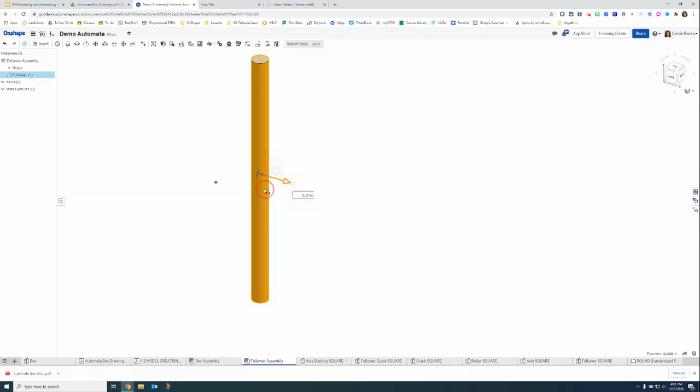Once we snap it, we're going to click that again. See if we can do it. There it is at the top. When I right click, I want to move that to origin, click out, and we are going to fix that.

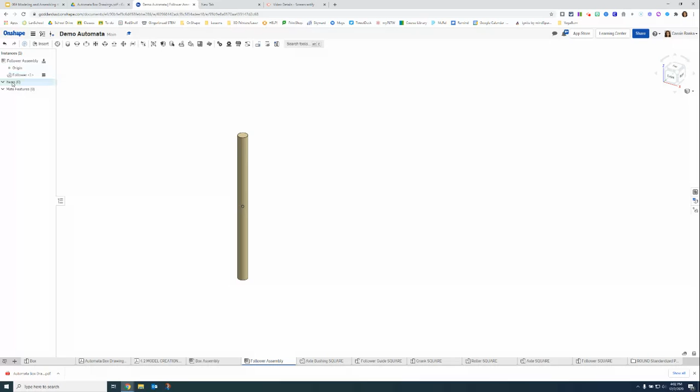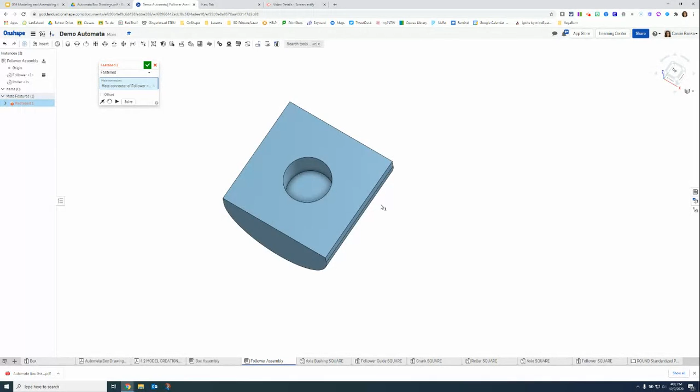That way the follower is what is not moving. Now I want to insert my roller, click to place, and I am going to use a fasten mate to glue the bottom of my follower to, now this is important, you're going to go to the inside, so you've got to zoom in. If you keep defaulting to this outer circle, that means your follower won't actually insert into the part that we modeled for it. So you want to make sure you get to that interior circle.

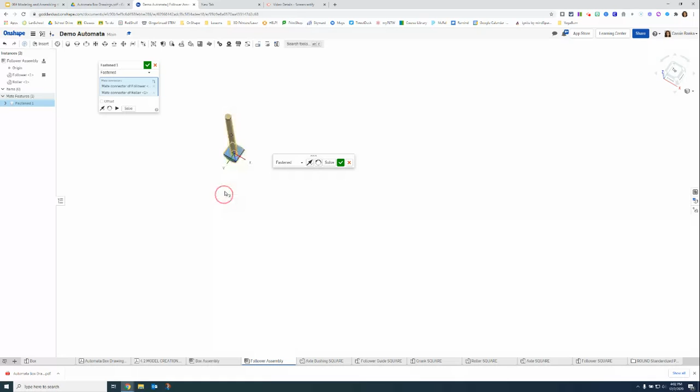Go ahead and click, and let's zoom out, see if it works, and it looks like it did. So I'm going to go ahead and hit good to go, and if we hover over that part, you can see that that part does go into the hole, just like we had designed it to do. We do not need a second fasten mate. So we are done with our follower assembly.

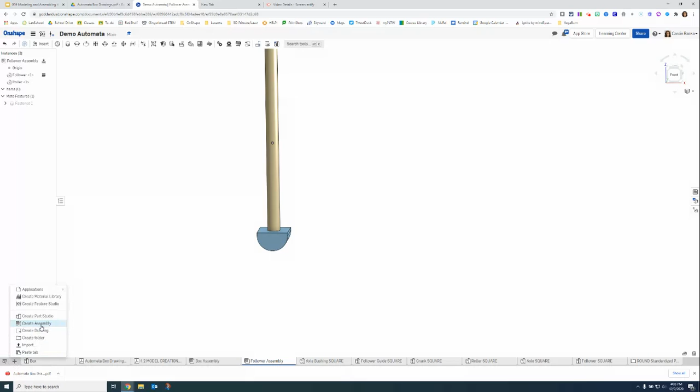Pretty easy, wasn't it? So the next part is actually a little tricky. We're going to do some offsets here, but we're going to create our crankshaft. I'm going to go ahead and create a new assembly, and we're going to rename it Crankshaft. I am going to start by inserting our axle, so bring in the axle.

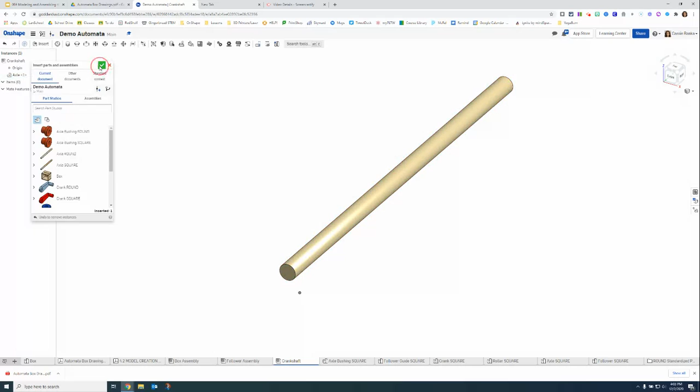First part, we want to make sure we get that little triad. Oh, green check mark, we're good. Grab our triad, grab that circle, find Pac-Man, then right click, move to origin. Right click, fix. And now we can kind of maneuver and start with adding in our bushings.

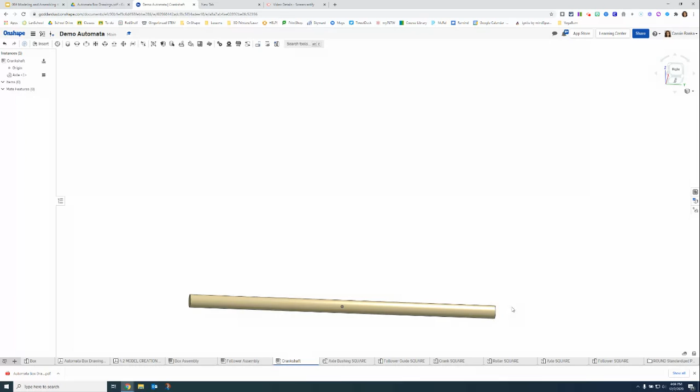The way this is going to work is everything is going to be fixed because they will rotate together once the crank kind of rotates around everything. We are going to insert our axle bushing.

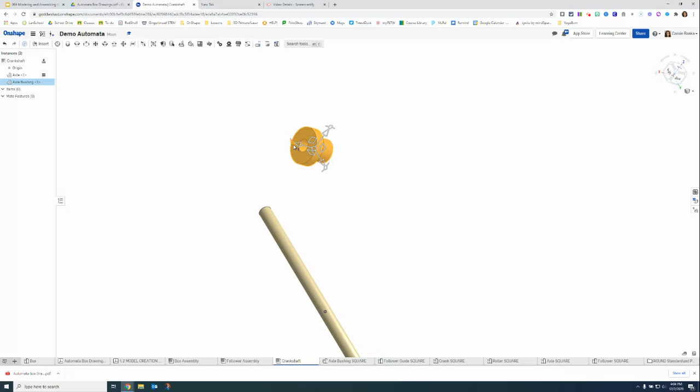You'll notice this axle bushing is not lining up, so we're going to highlight. Well, let's try accept. We're going to highlight, and then we're going to use these rotators to allow us to move it the way we want it to go. I'm going to grab this little sun guy, and that will let me rotate it around the way that I want it to go. Then I can kind of move it to where I want it to go.

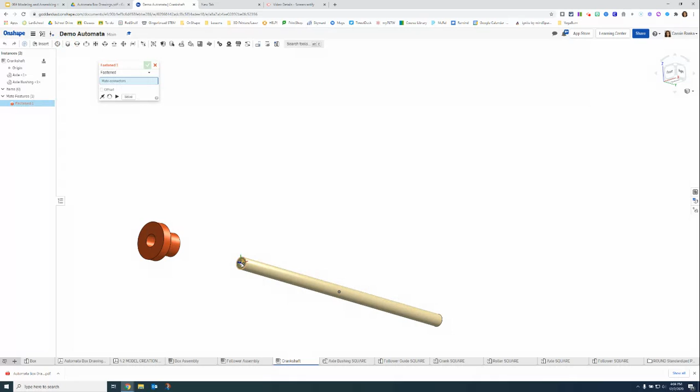Now with this, the way this is going to work, I want the end of my dowel rod to be flush with the end of my axle bushing. So when I'm using my fasten mate, I want to keep that in mind, that I want my blue arrow pointing out from the end of the dowel rod, but I want it to go all the way in to this bottom circle, and I want that blue arrow facing outward. So there we go. We've got our axle in the axle bushing, and everything is good.

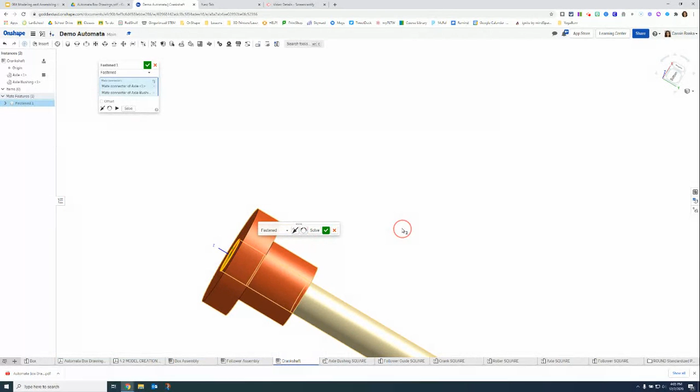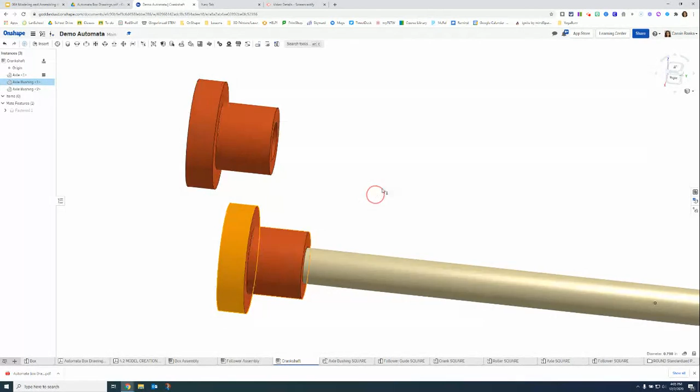Now we are going to do this again with another axle bushing. I'm going to right click. Let's see if I can copy axle bushing, and then we're going to paste axle bushing. I'm going to do the same thing.

But this time I want the axle bushing completely facing the other way. So I'm going to go to 180, type that in, and I want the bottom edge...

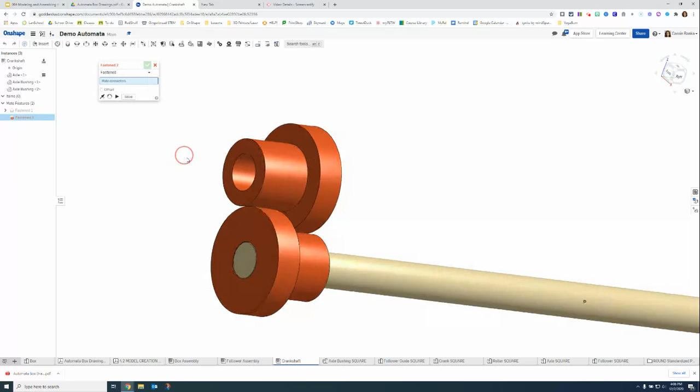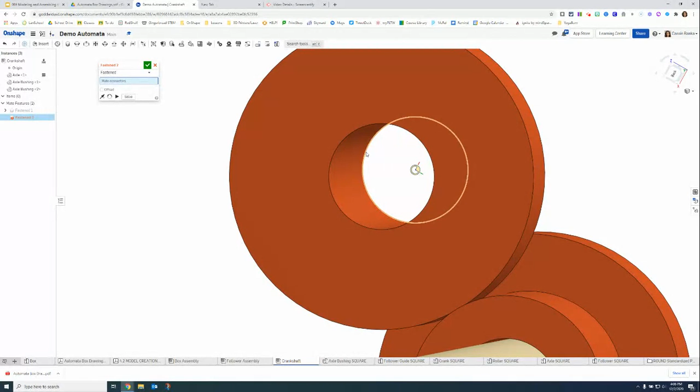To be flush with this dowel rod. So we are going to do the bottom circle again. And, ooh, I don't think that's going to work because see how my blue arrow is pointing the wrong way? Let's go ahead and start and go in from this direction. Grab that bottom circle.

And then we're going to go to the axle edge. And this time we're going to get a little tricky. We're going to use an offset. This may take a little bit of tinkering around with the subassembly once we put it in the box. But we're going to go to our box assembly real quick.

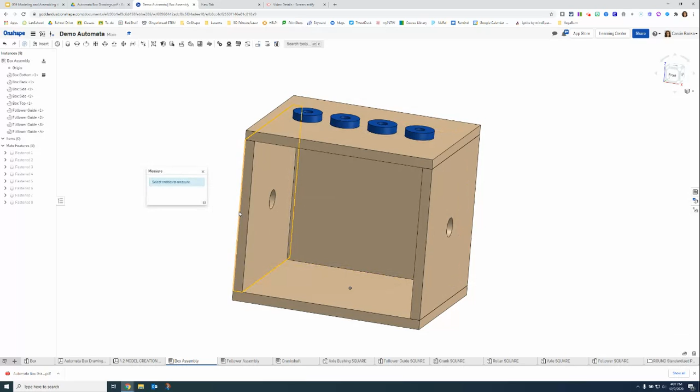And down in the bottom corner, there's this measure option. And I'm actually going to choose this outside edge, and I'm going to click this other outside edge. I don't want to highlight too much because I really want to know the outer distance. We could tell this from our plans too, but I wanted to show you the measure tool in Onshape. We have a measurement of a distance between 5 inches.

So my goal is for those axle bushings to actually be 5 inches apart so that they nestle just right when we assemble it.

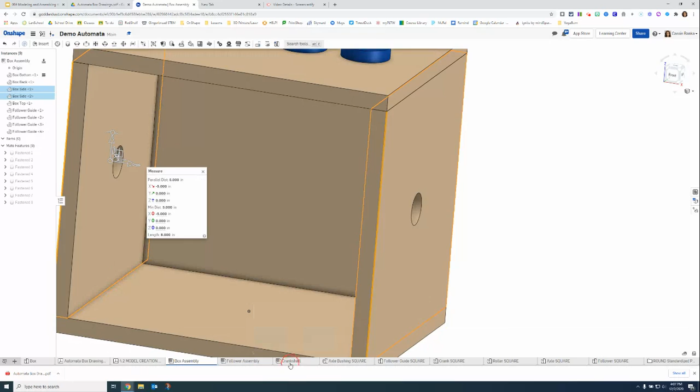So when I do my offset, I'm going to go back into Fasten Mate, and I'm going to add in a Z offset, because that's the Z axis is what we aligned. Let's try a 5. And you'll notice that it went the wrong way. So I'm going to do a -5 and hit enter.

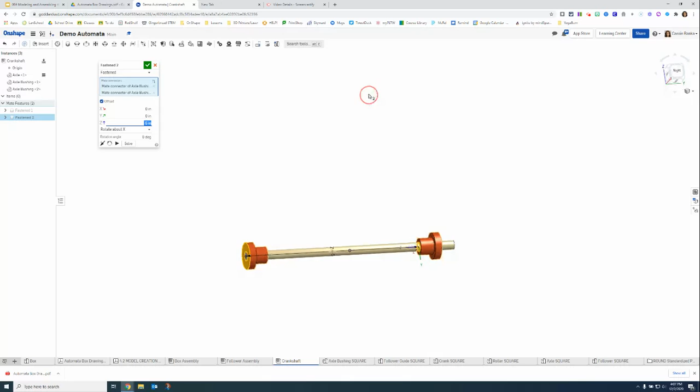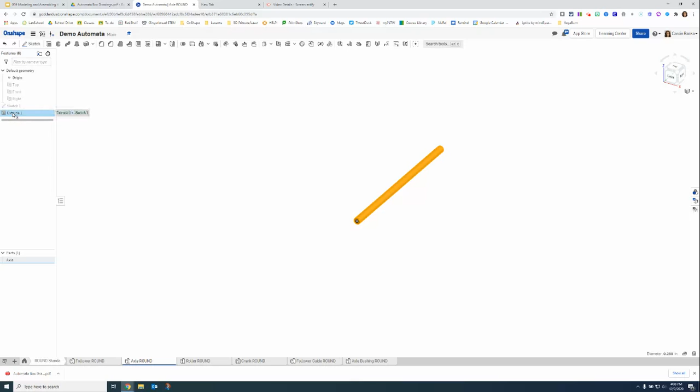And already I can tell that that's probably not going to work. But I'm going to go ahead and accept it because there is one thing I want to check. I want to check, I do believe I shortened one of these axles. According to our plans, it should be 7 inches long. And if I look at this extrude...

I had shortened it. So this is 7 inches. Okay. And then if we go back to our crankshaft, you can see it got a little bit longer. So that's kind of the nice thing about when we're using CAD is that it'll update part instances wherever you go.

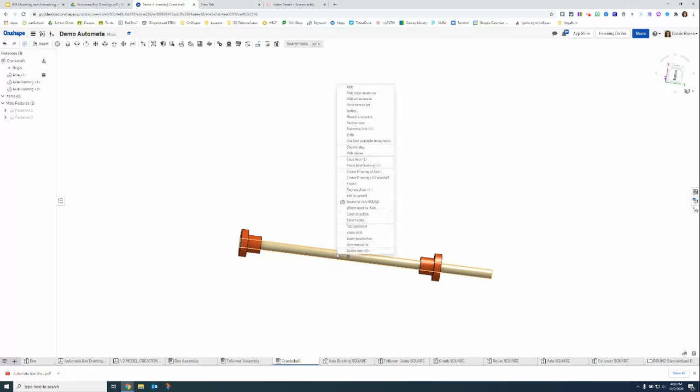So the way I did that, just so you know, is I went to switch to Axle ROUND. That is the part file. I could have also edited it in context, which means that I have the assembly pulled up, but all my commands here are for the part, and I could have edited that extrusion directly there. And then I click go to assembly to return.

Okay, so that is good for now. Those are the sub-assemblies that we're going to need to be able to place into our boxes in the next video.